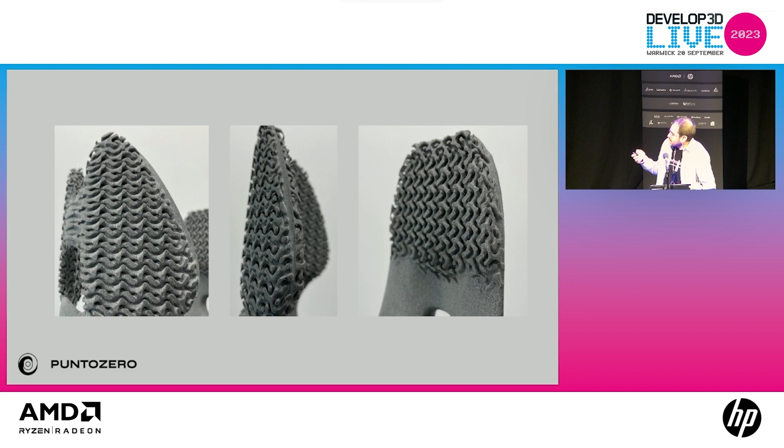Gyroids everywhere. And so with the gyroid structure, we had this opportunity to really change. Gyroid structures are TPMS structures, so they are fully driven by math, designed by math. So this is a big opportunity because you can tune the structure as you want in each point of the 3D space. So we created a structure that is driven by field and modified with vectors.

And if you see in the part, you can see this part of the gyroid that is not the same as the classical gyroid. With this vector field manipulation, we have done something that was alternating. So we have, like Velcro, something that works with hooks and pins. This gyroid structure was just one of the two parts of the interchangeability. And with this manipulation, we had this new kind of modified gyroid.

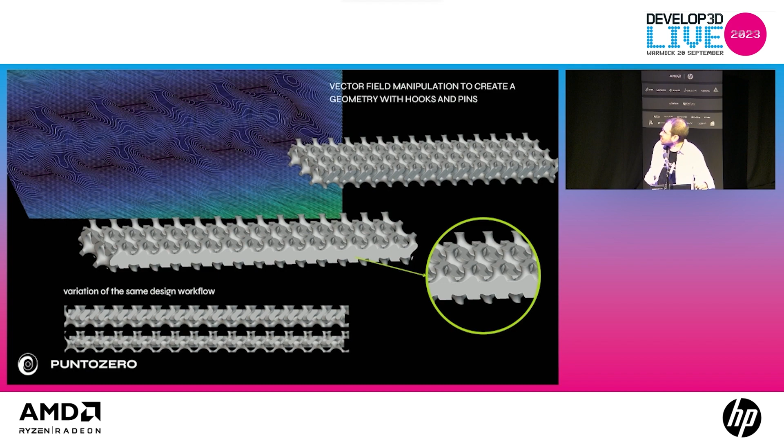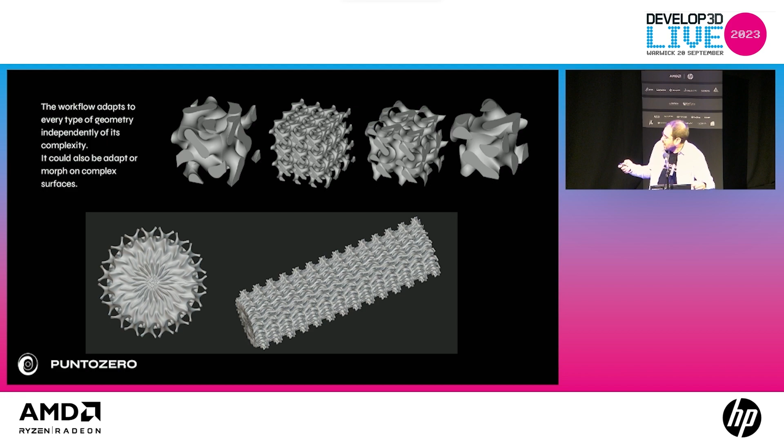With this, we have a few parameters for changing the density, for changing the shapes, for changing the fit that was created at the top. And since everything is driven by math, we are also able to shape these things around every different shape, independently of the complexity of the geometry. So again, if you see the part that I was showing before, you can see that this part is completely conformal to a curved surface.

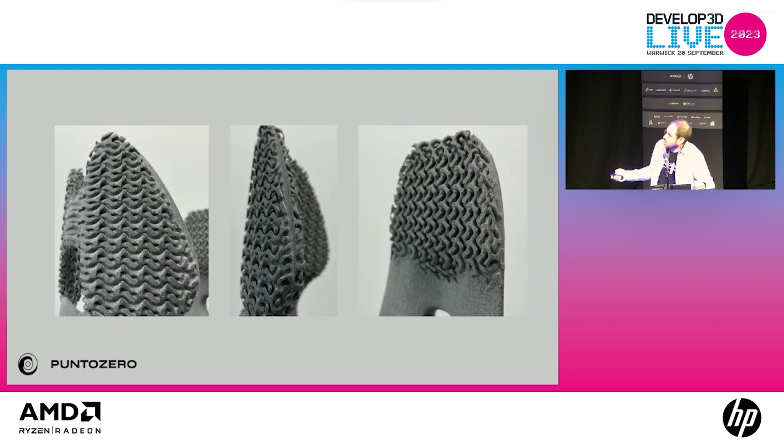So the idea around that is not just, okay, what we can do is Velcro things. No, the idea is that you can do these kinds of structures as surface structures. And you can do them in different types of material. You can have rigid with rigid, rigid with soft, soft with soft. And also think about if we have this kind of component and we can print in metal or in ceramics. We can open new opportunities for doing new kinds of stuff in aerospace or in medical,

or even if you have to, I don't know, combine metal with composite. You can use that as an interchange, like a mechanism to bond together. And even if you want two different components, one rigid and one soft, you can maybe remove glue in the future. So this could be something to think about.

And this is another project that we have done in the past. It is a component that we made for this crazy pilot in Italy. We worked on this part that is actually the linkage of the motorbike. And I know there are lattice structures, and it is a motorcycle for cross and stuff like that. So it doesn't seem so clever to do lattice structures there. But in a minute, I will explain why.

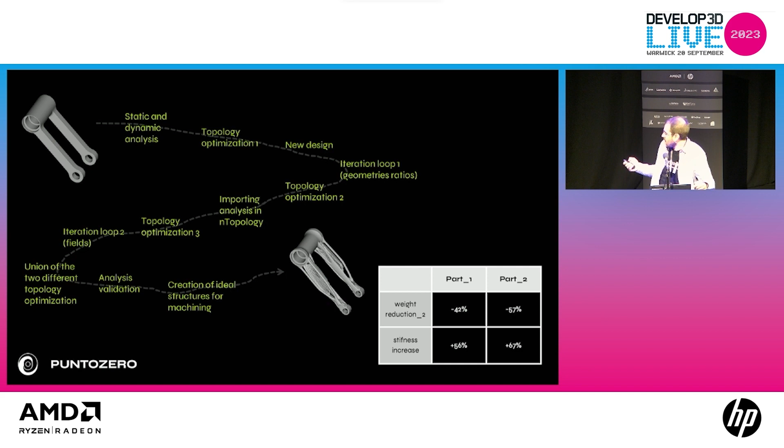And why that? I will explain why, but these are the numbers that we have achieved with this kind of workflow. So they are actually lighter, but they are also stiffer compared to the first one. And I'm speaking about this one because we are trying to improve the workflow also with some concept of changing the shapes, not just removing or adding material.

And that is the final goal. We have done static analysis on it and everything passed. And we are doing fatigue tests because we were also trying to use a new kind of powder on this component, really close to the Scalmalloy things. And why we are doing also lattices.

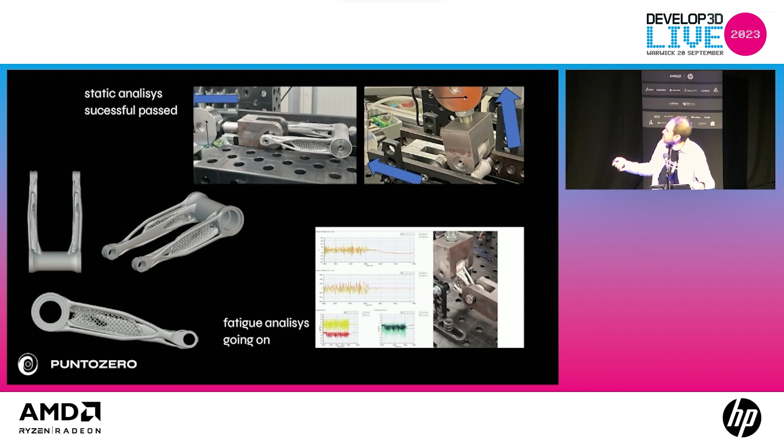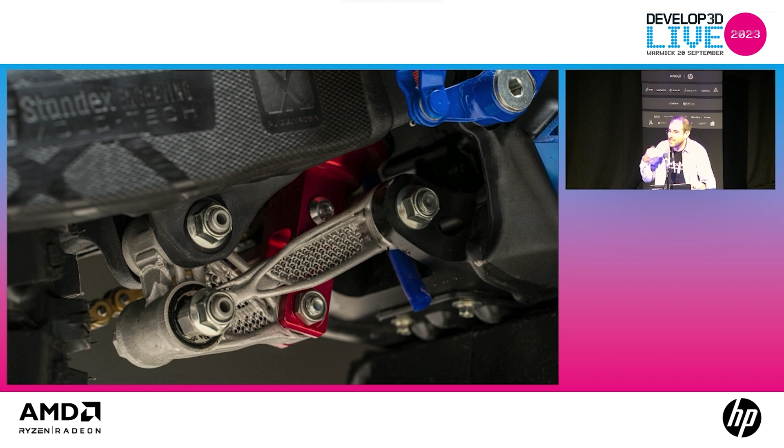Lattice here, we have used that just as a concept. So you can see also that all the component is really, really rough. It seems not finished. It seems not designed in a correct way. That is the external part, the new design space I was trying to explain before. So we leave that just to make you understand the concept around that. And the same thing is also for the lattice structures.

The lattice structures, because the idea is in the future we can use lattice structure not just for structural things, but also as a sort of additional component. If you're using a very light material, very optimized things, you may want a sort of supplemental structure that tells you when there could be a fracture. So the lattice structure could be around some component, where there is the max stress distribution, just to be aware when some crack is going to happen in the future.

This is the last thing. This is a product. It's not a product on the market, but we have developed this kind of mask in collaboration with this company, a company that is doing glasses and masks for big brands in sports. And the idea around that was that the classical mask is done with different components. So there is the lens, there is the strap, but then there is the frame, the tissue around that, the foam, the gluing part.

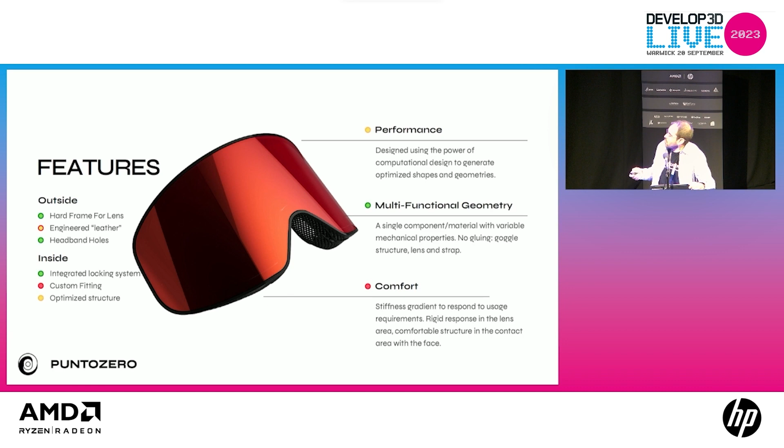And so the idea was let's try to do everything in one component. The lens and the strap are still the same, but the frame, the foam, the contact part with the skin, the frame also for the strap, is everything inside this component. So, if we start from the outside, we have created this kind of geometry that again takes inspiration from nature, from the natural effect that the lotus has.

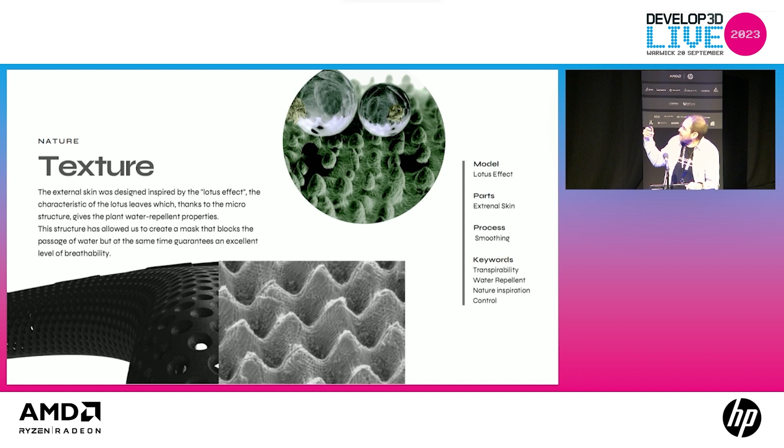So we have done some iterations, because you have to change the geometry and the distribution of these holes, but also because we need post-processing for this component. With the post-process, you're changing the shapes of the holes. So we have created these holes that give breathability, which is one good thing you can achieve with additive manufacturing in general, but at the same time, liquids are not coming inside.

And if you see the part, maybe it's not so visible here, but the distribution is slightly changing along the contact part with the skin. And if you see on the inside, there are kind of lamellar things. The lamellar things, again, are gyroid structures. We have done some design exploration in order to tweak the mechanical properties of the gyroid structures to have different kinds of density foam.

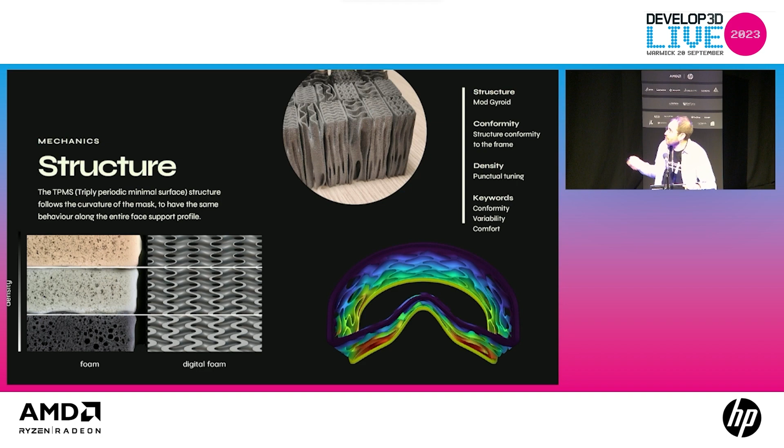So you are actually able to stretch the geometry, to have a gradient on the thickness of the part, but also on the stretching of the gyroid, in order to have a different response of the foam that is created inside the mask. And this is also done because when you do a product that is going to be in production, you also need to manage the complexity of the post-process, the depowderability. That is the really tough part. And this was more or less the workflow that we have used.

And so this is the component that we finished like 3 months ago. That is it for my presentation.